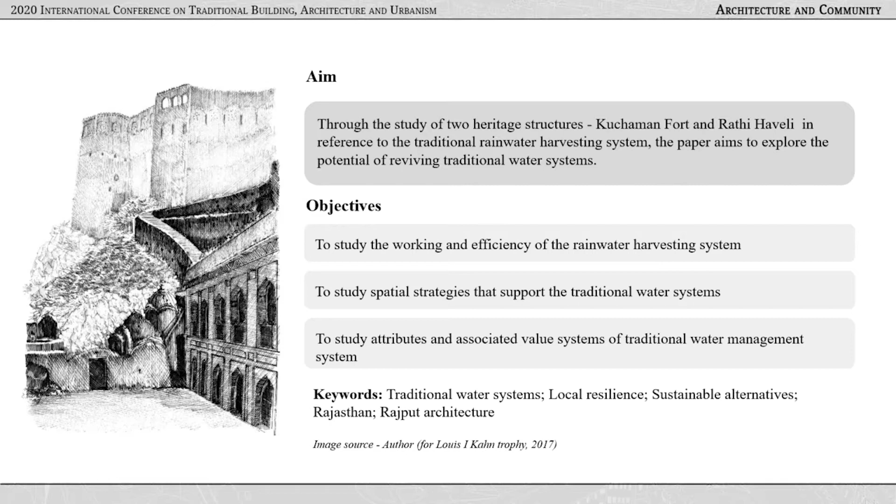The paper aims to explore the potential of revival of traditional water system through the study of two heritage structures of the city of Kuchaman, the Kuchaman Fort and the Rathi Haveli, in reference to the system. Coming down to the objectives of the study, it focuses upon the working and efficiency of traditional rainwater harvesting system, the spatial strategies that support this system, and the attributes and value systems associated with the traditional water management system.

Studying architectural elements and planning strategies of the fort to understand the built form that supports them. And also studying the lifestyle and cultural norms of the community in relation to the traditional system to understand its significance for the continuity of the knowledge system. The inferences drawn from the study put forward a set of principles that could help develop a context-specific design of rainwater harvesting system for the large settlements of the region.

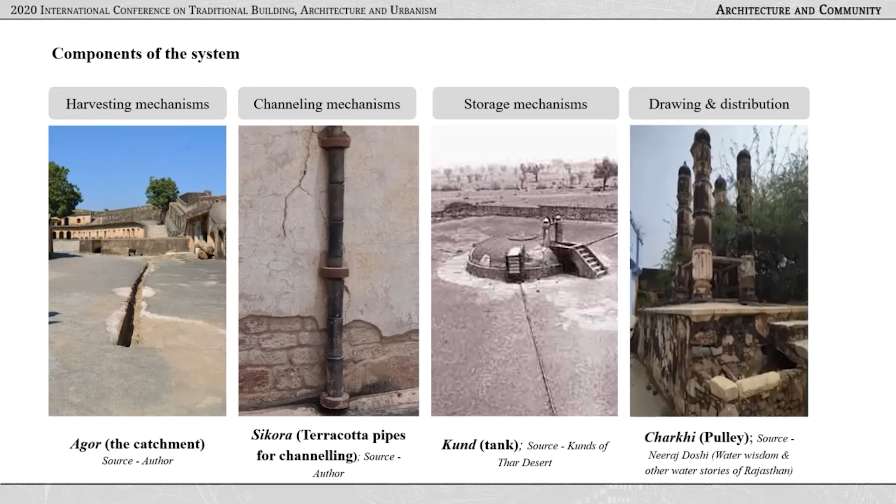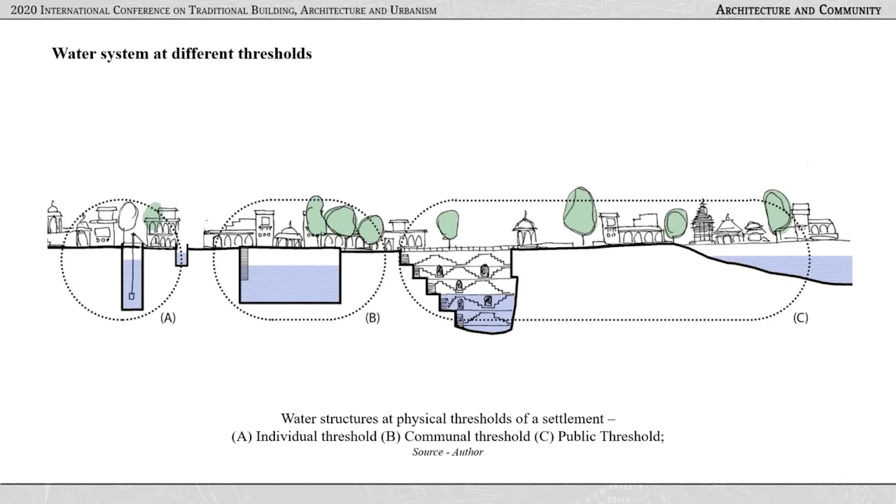At a public level, larger water structures built by rulers stored water that could provide for the requirement of the entire settlement. The decentralized network of water structures in traditional settlements ensured the communities were resilient against any climatic anomalies.

These water structures also have an element of sacredness attached to them. A religious aspect, where temples are built adjacent to the water structure to keep the premises clean. Sacredness associated with the water drawers' chambers, as seen from the case of Rathi Haveli, where a person isn't allowed to enter the chamber without proper hygiene. Restricted access to surfaces that act as catchments.

Coming down to our primary study, Kuchaman, a town of Nagaur, Rajasthan, was a Jagir or a vassal under the erstwhile Marwar kingdom. Considered one of the most impressive fortresses of Rajasthan, Kuchaman Fort was first fortified to control salt-producing areas of the region. It later expanded to accommodate a military barrack, a royal complex, and service and public areas.

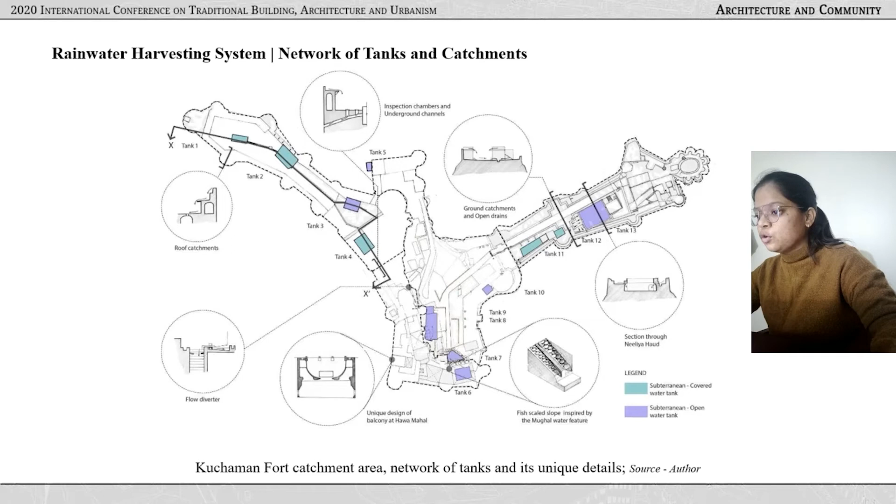13 out of 15 tanks of the fort are still standing, as highlighted in the image. Strategic placement of the tanks in proximity to the built form in each zone reduces physical activity for supply of water. The tanks are designed with carrying capacities meeting requirements of the activities in each zone. All the surfaces of the fort act as a catchment, generating a web of tanks that taps all rainwater. Placement of tanks follows the contour of the hills, ensuring that the overflow of one tank goes into another tank. The type of tank, open or closed, defines the quality of water it provides, and hence the distribution of open and closed tanks in a zone goes with the requirement of potable and non-potable water.

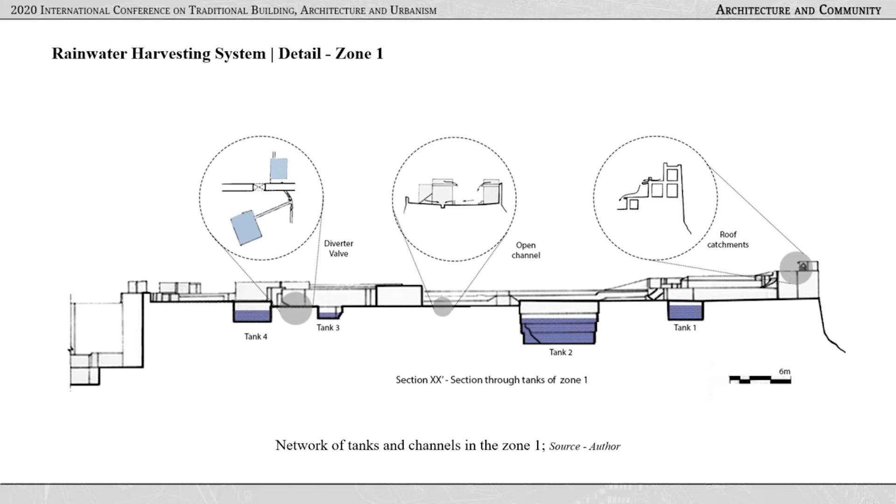The image here is a section of Zone 1 of the fort with the network of tanks, 3 underground and 1 open, constructed along the slope of the hill to allow the overflow of one tank to be channeled to another. Water from the initial monsoon that cleans the catchment is collected into open tank 3, with inlets of tanks 1 and 2 blocked. The subsequent showers are first collected in tank 1, where the impurities are sedimented, and tank 2 stores its surplus. The surplus of tank 2 can be diverted to tank 3 or tank 4 via diverters as shown in the detail, depending upon the need of the military barracks.

These are 4 different tanks from the fort that highlight design features. Designed with the principle of sedimentation in mind, most impurities in those times were natural, non-toxic, and could be easily filtered by sedimentation.

These tanks were often assisted by small sedimentation tanks. Each tank has a distinct geometry. Smaller tanks are cuboidal. Tanks with more considerable depth have stepped retaining walls, while vaulted roofs support tanks with larger surface area. Carrying capacity, topography, and soil strata define the geometry of the tank.

They were designed to limit evaporative losses. There is a varying ratio of depth to the surface area of the structure. Lowering surface area limits evaporative losses. They were designed for ease of maintenance also. The lower surface area at the bottom makes cleaning sediments from the tank floor easier.

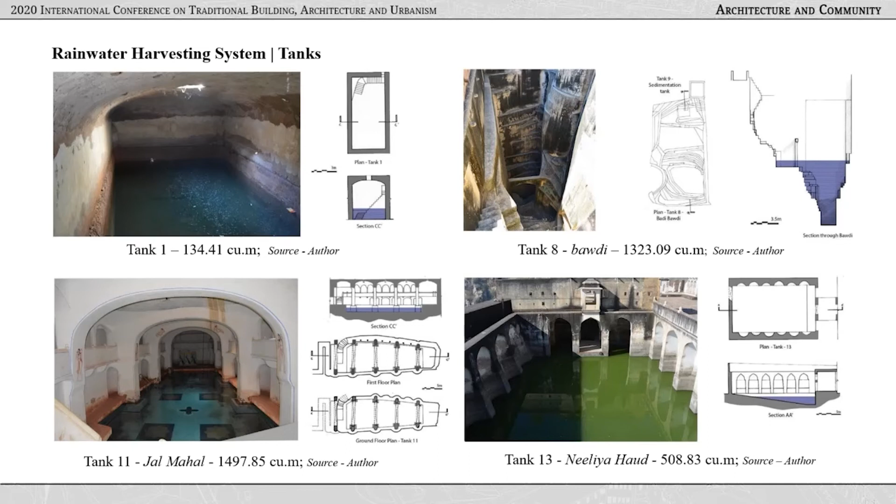They were designed for frugal use. Driven by cultural notions of frugal use, they are categorized. There are tanks that store fresh water for primary needs and tanks that store reusable water for secondary needs.

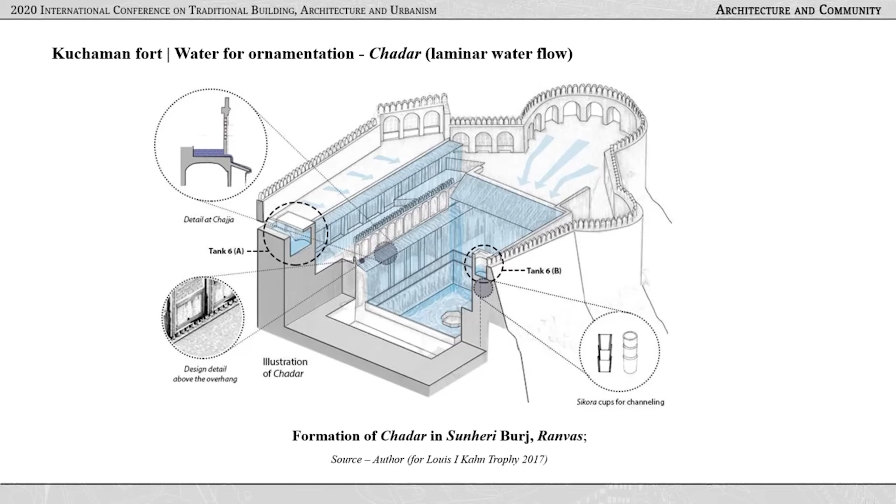In a land where availability of water is scarce, it is arresting to witness ornamental use of water. Chadar water lamina, an ornamental feature where an entire courtyard is converted into a pool laminated with sheets of water falling from the overhang. Fountains operated using traditional pipings. And this is how it looks.

The design of Hawa Mahal, or the Palace of Wind, is centered on using water to maximize thermal comfort. The balcony of this summer palace is oriented in the prevailing wind direction to capture the summer wind. When hot afternoon air strikes the closed balcony doors, it carries the evaporated water from a small basin on the balcony floor along the apsidal surface.

The shape of the balcony facilitates airflow towards the window. The window generates low pressure at the apsidal end and creates a surge of cool breeze into the room. The air that strikes the apsidal surface moves along the vortex formed at the apsidal ends. It then joins the wind at the inlet aperture. Thus, the balcony directs all the moisture inside the room.

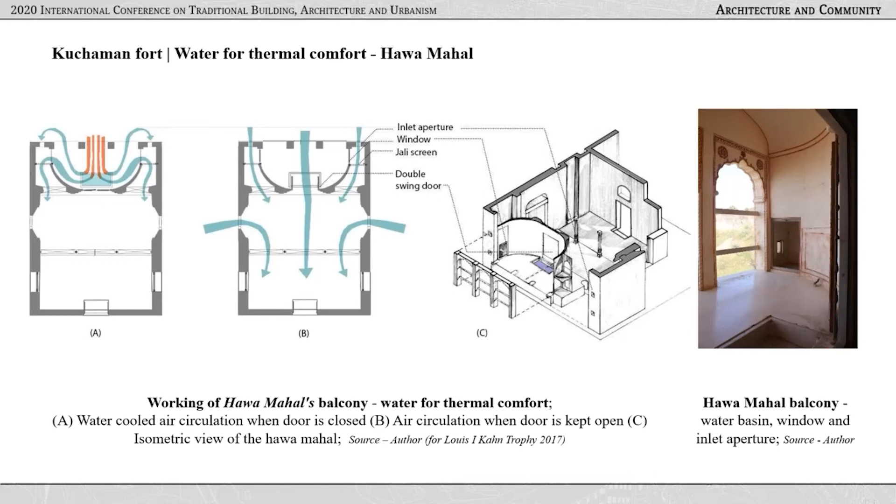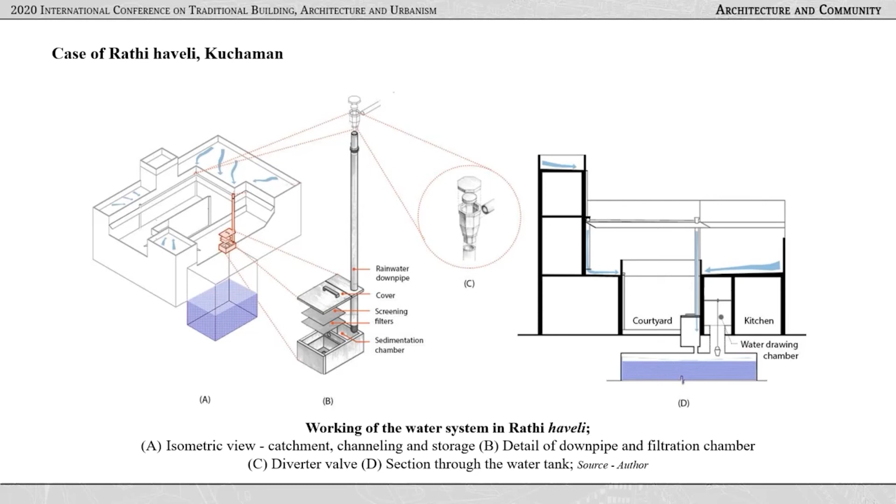A quantitative analysis of the traditional rainwater harvesting system in the fort and Rathi Haveli has been done to emphasize its efficiency. Based on the annual rainfall of the region, the rainwater harvesting system in the fort provides for a population of 250 people for over a year.

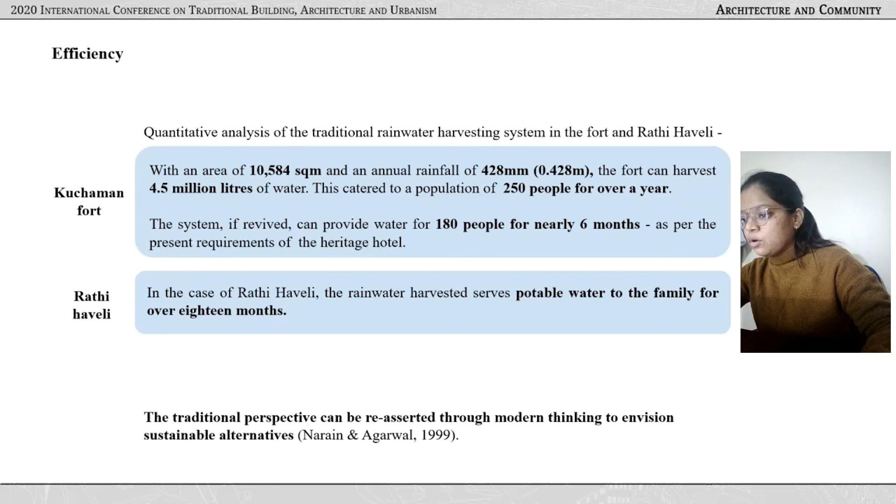The system, if revived, can provide water for 180 people for nearly 6 months as per the present requirement of the Heritage Hotel. In the case of Rathi Haveli, the rainwater harvested serves potable water to the family for over 18 months. The numerical evidence from the two cases suggests that the revival of the traditional water system could prove to be a sustainable alternative to the existing system.

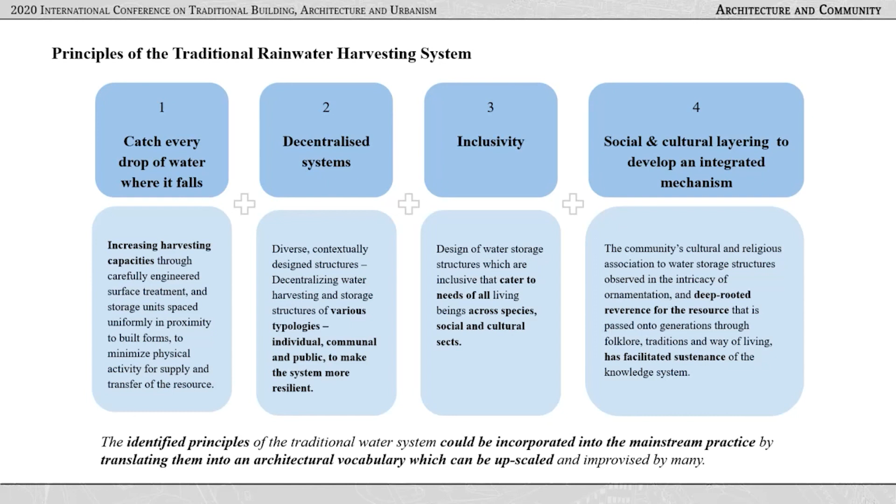The traditional system underlines certain principles, and these principles have the potential to be incorporated into contemporary practice. They are: catch every drop of water where it falls, decentralized water system, inclusive design, and social and cultural layering to develop an integrated mechanism. The numerical evidence from the two cases suggests that the revival of this traditional water system could prove to be a sustainable alternative to the existing system.

So we can conclude that traditional knowledge systems were developed to provide all necessities of life in a specific region. To achieve that, extensive research has been done for a specific area in regards to the climate, hydrology, soil, flora, fauna, materials, etc. This knowledge was woven into the culture to ensure survival and developed into identity.

Through the study of Kuchaman Fort and Rathi Haveli, one realizes its quantitative efficiency and simple timelessness. The solution to the climate crisis we are facing is with us, within our traditional wisdom. We need to introspect deeper. Since each region is unique, their problem and solution would also be contextual.